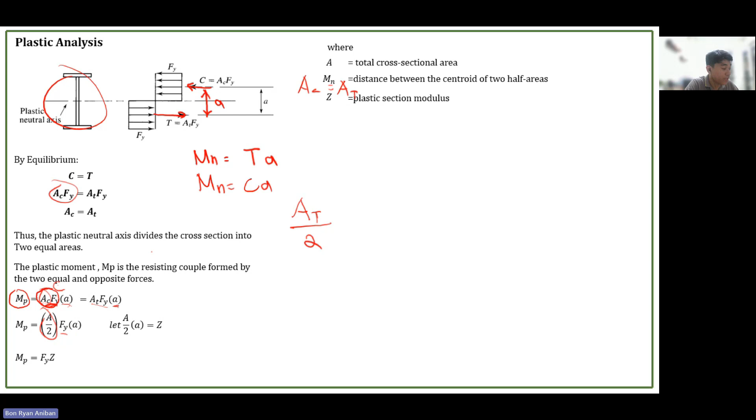Now let's say we call that A over 2 times A is equal to Z. So we name it Z. Now, that Z - therefore the value of the plastic moment is Fy times Z. So Z is the plastic section modulus, and Mn is the distance between the centroid of the two half areas - again, A over 2 times A is your Z.

So you get half of your area times A, or you can also do it this way: take the half, then you have the total area. So it means you need to get the area, then you need to identify the distance going to this axis - you divide it in half, and you have to identify this axis, and that is your Z.

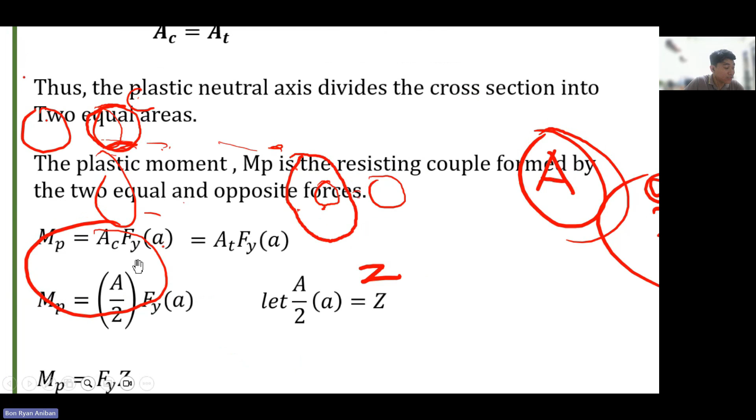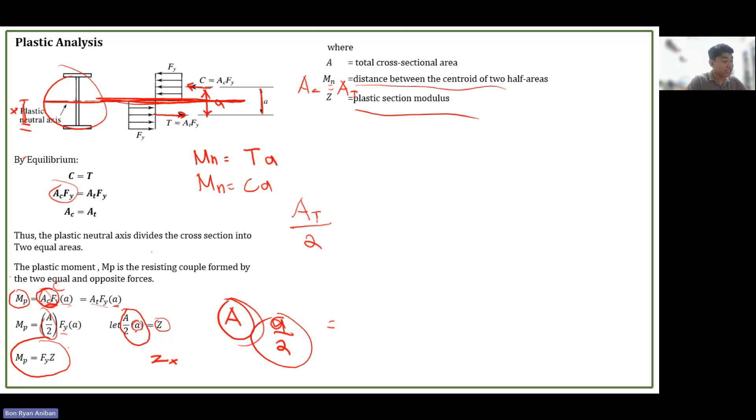Or on standard AISC standards, we call that ZX. So there's also ZY, but if we're referring to this axis, that is your ZX. Later on, we are going to try to solve some problems and locate that distance X, or the plastic neutral axis - so we're going to solve this plastic neutral axis.

Now let's try to solve this plastic moment and elastic moment. From the built-up section shown in the figure, bending is about the x-axis, and the steel is A572 grade 50, with Fu of 450 megapascal and Fy of 345 megapascal. The section properties are the base flange - this is a built-up section, meaning we don't have any data from the AISC database. You have the base flange, thickness of flange, effective depth, thickness of web, modulus of elasticity, and the Fy. So we are going to get the yielding moment, My, and then the plastic moment. So what is the difference between the yielding moment and the plastic moment?

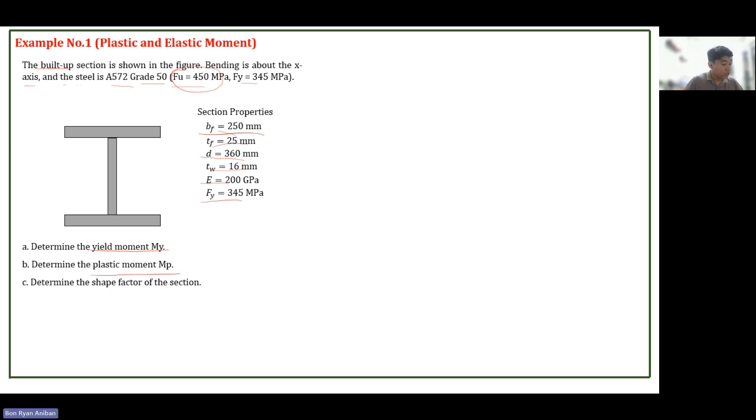This stress diagram was discussed in your mechanics of deformable bodies. To calculate the moment capacity of this section, this is the bending stress, MC over I. You may calculate the bending stress this way, as derived from mechanics of deformable bodies, so I won't repeat it here.

So this is MC over I, or I over C. When you divide it, I over C is called Sx. So therefore, for Fy, we can say that My over Sx equals Fy. And to calculate My, My is equal to Fy times Sx.

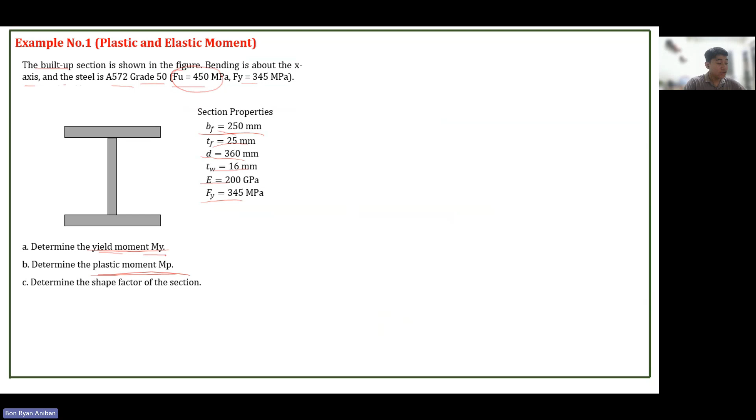So here, we are solving for the yielding moment, which comes from the stress diagram where only the extreme layers have yielded. When we say plastic moment, the entire cross-section has already yielded. So we also need the shape factor of the section.

These are the dimensions from the given problem. We just placed them in our figure.

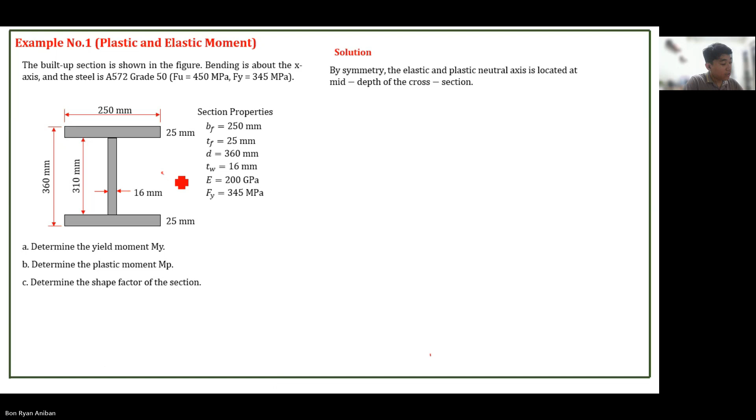By symmetry, the elastic and plastic neutral axis is located at the mid-depth of the cross-section. This is the beauty of a symmetrical section — when it's symmetrical about this axis, the neutral axis is right there, even the plastic neutral axis. But they can differ — we call this the elastic neutral axis.

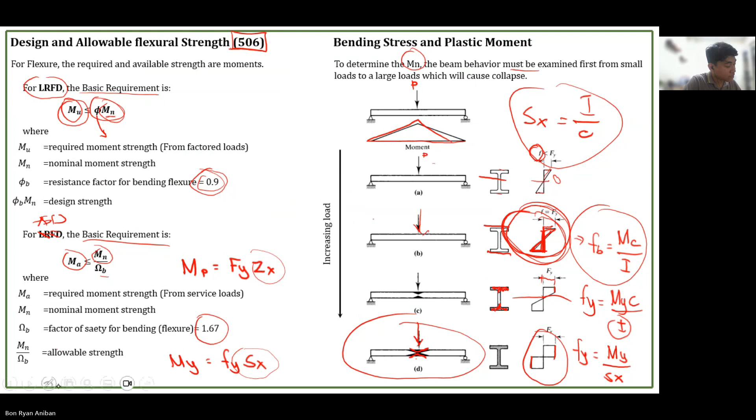When our stress diagram looks like this, the beam is still elastic, because only the extreme layer has yielded — the entire cross-section has not yet yielded. And when it hasn't yielded, the material is still elastic, meaning if you remove the load, it will just go back to its original shape.

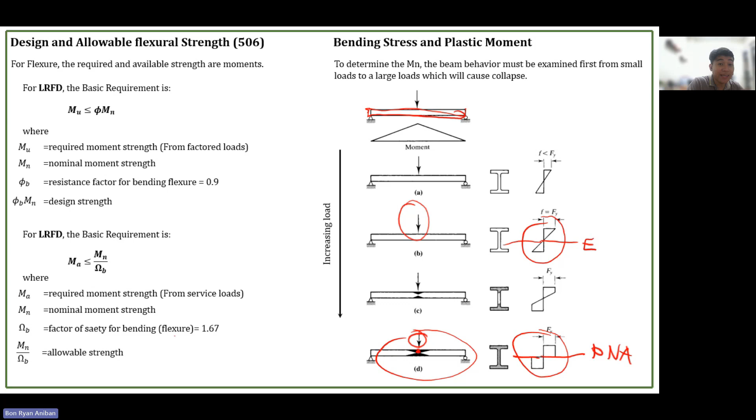For a symmetric section, the neutral axis and the plastic neutral axis are at the center, so you don't need to solve for that. Later, let's try to solve for the unsymmetric case. So for the elastic properties, we'll try to solve the elastic properties.

So we have the moment of inertia — actually, moment of inertia is an elastic property. To get the moment of inertia about the neutral axis, we actually have two solutions. One is the transfer formula.

This is our overall neutral axis. If you divide this into three sections or three areas, this area coincides with the neutral axis, so just get its moment of inertia, BH cubed over 12. But this area's own centroid does not coincide with the overall neutral axis, so there's a distance, and that's when you need to transfer it.

If you recall from statics, we have the transfer formula: Ix equals BH cubed over 12. The moment of inertia about the neutral axis equals the moment of inertia of its own section plus area times d squared — the distance from its own centroid to the neutral axis.

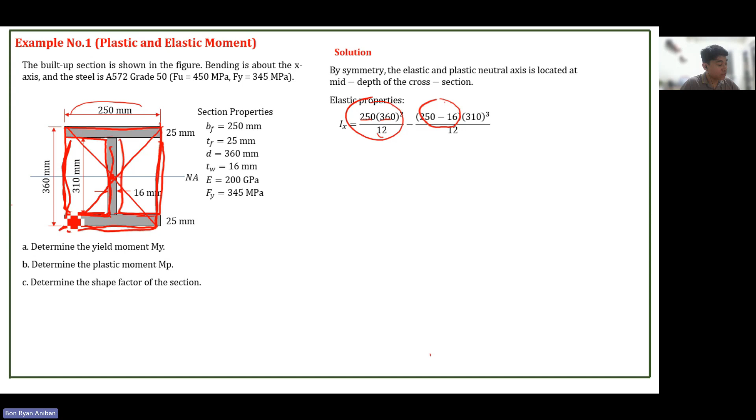Then, since there are actually holes here, we just subtract them — there are two holes, but I combined them. So our B here becomes 250 minus 16, the total dimension plus this one, 250 minus 16, times H, 310 cubed over 12. That will be the moment of inertia about the x-axis.

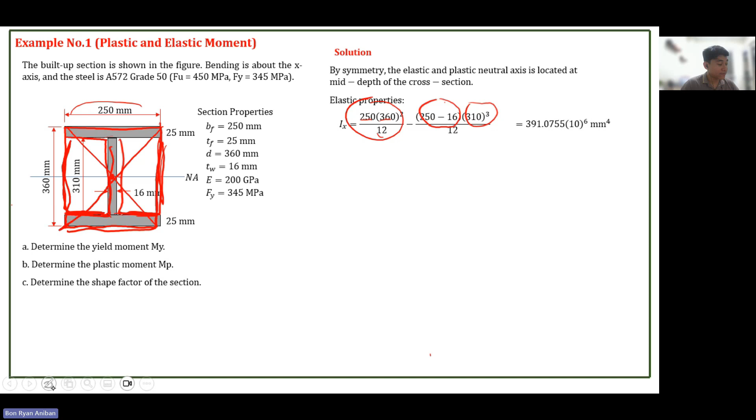About the y-axis and about the x-axis, let's discuss first the yielding moment and the plastic moment about the x-axis. Mainly, a beam should be placed such that it will bend about the major axis, the stronger axis.

We have the radius of gyration about x and y, and moment of inertia about x and y. You can justify how strong an axis is by just looking at the moment of inertia. From the standard sections, the y-axis is always weaker.

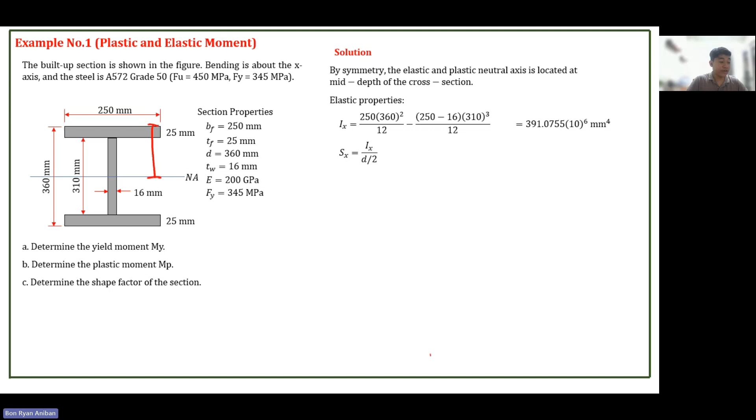Here in this problem, mostly the x-axis is what we analyze. Now, Sx is just Ix divided by the distance D over 2. That is our Sx.

So we divide 391.0755 by 360 over 2. This will be your Sx.

Now to calculate the yield moment or My, that is just Fy times Sx. We showed the formula earlier. Fy times Sx, substitute Fy as 345 megapascal, and then Sx. Take note class, Fy is in megapascal or Newton per square millimeter, and Sx is in millimeter cubed.

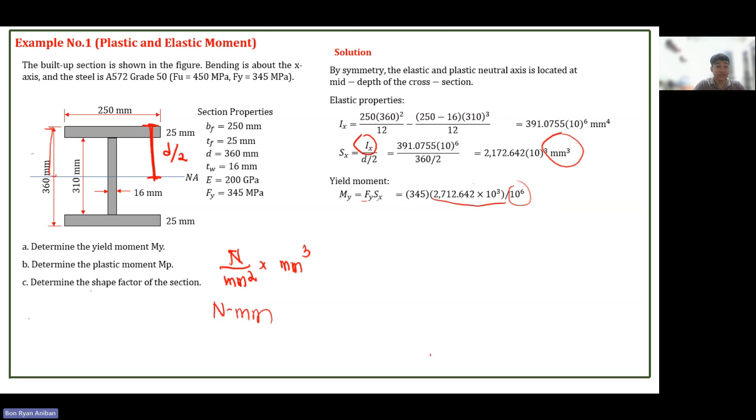So therefore, what will be your answer? Newton-mm. Mostly we express moment in terms of kilonewton meter, so we divide this by 10 raised to 6, or multiply by 10 raised to negative 6, so that our answer for moment becomes kilonewtons. So the yielding moment is 749.561 kilonewton meters.

We already have the answer here. Next is the plastic properties, let's proceed. One of the plastic properties is the plastic section modulus, or Zx.

Zx can be calculated by area times Y, as we showed earlier, but instead of total area, we use the summation of areas times its distance going to the plastic neutral axis. So summation of area times Y.

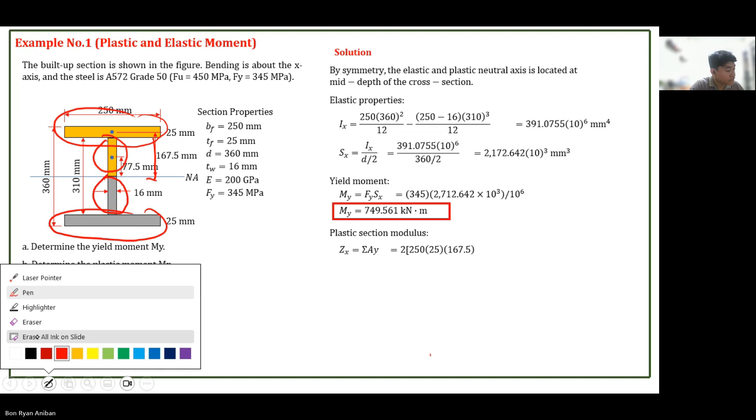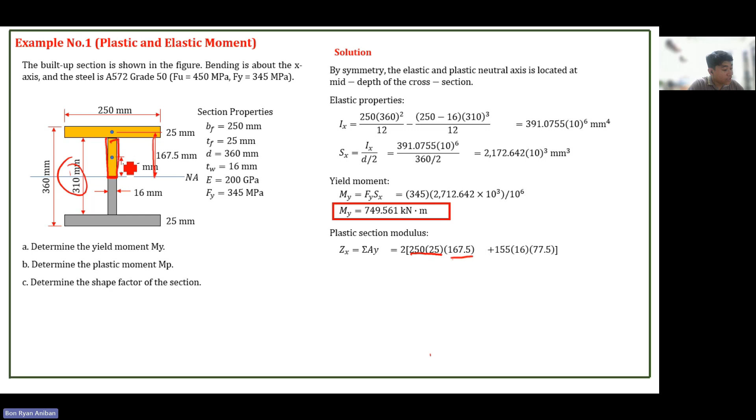So here it is: 250 times 25, that's the area, and its Y is 167.5, plus 310 over 2 is 155, times 16, times this distance of 77.5. Then we multiply by 2, class, because there's one at the top and one at the bottom.

Times 2, your Zx is 2478.15 times 10 raised to 3. So with Zx, we can now get the plastic moment. The plastic moment is Fy times Zx, where Fy is 345 megapascal.

And the Zx we got, times 10 raised to 3, is in millimeter cubed as well. Fy is in Newton per square millimeter, so therefore Newton-mm also results, times 10 raised to negative 6. So the plastic moment is 854.

Remember class, that the plastic moment is already larger than the yielding moment, so its capacity is higher, you get a higher value, because the entire cross-section already yields. Whereas for yield moment, only the extreme layer of our section yields, just the very edge. So, what is shape factor?

Shape factor is actually the ratio of the plastic moment to the yield moment. Or you can simply say Zx over Sx, because plastic moment is Fy times Zx, and you divide it by the yielding moment which is Fy times Sx. The Fy cancels out, so it's just Zx over Sx. That is the shape factor.

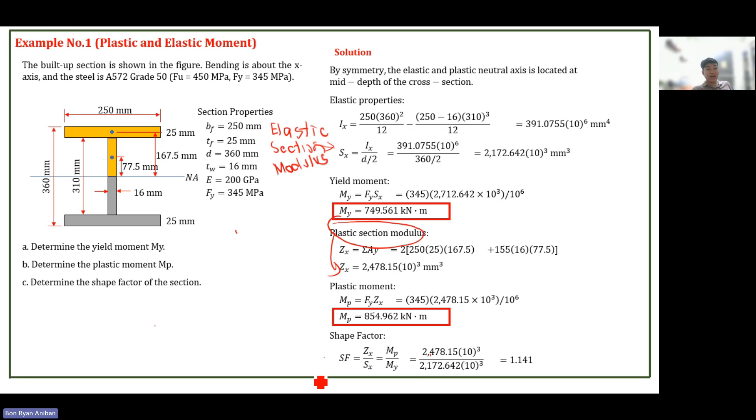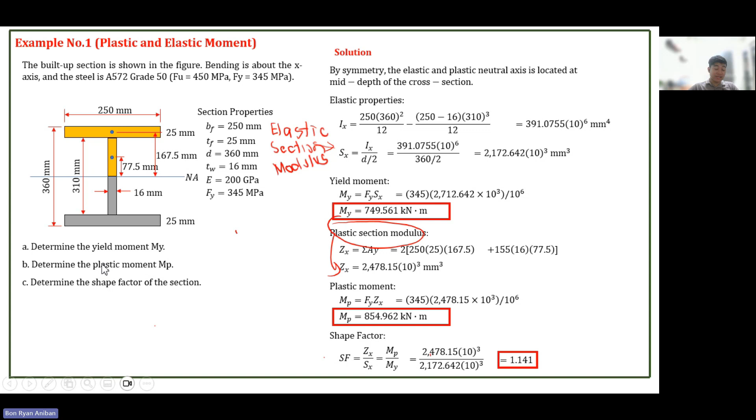Now let's try to solve unsymmetrical naman. We are going to solve the plastic and elastic moment. For this built-up T section shown, using Fy of 345 megapascal and Fu of 450, find the yielding moment, the plastic moment, and then the shape factor of the section.

Unfortunately, the elastic neutral axis does not coincide with the plastic neutral axis if it is unsymmetric about the x-axis. So we have to solve for both the plastic neutral axis and the elastic neutral axis.

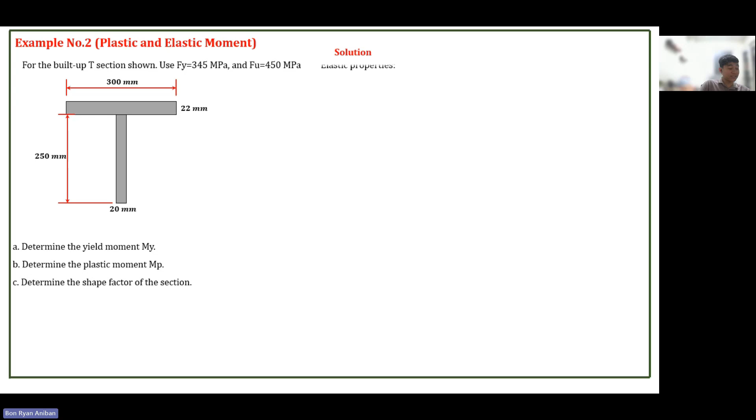This is to get the neutral axis. The neutral axis you studied in statics up to mechanics, that is actually elastic. So the assumption is just elastic.

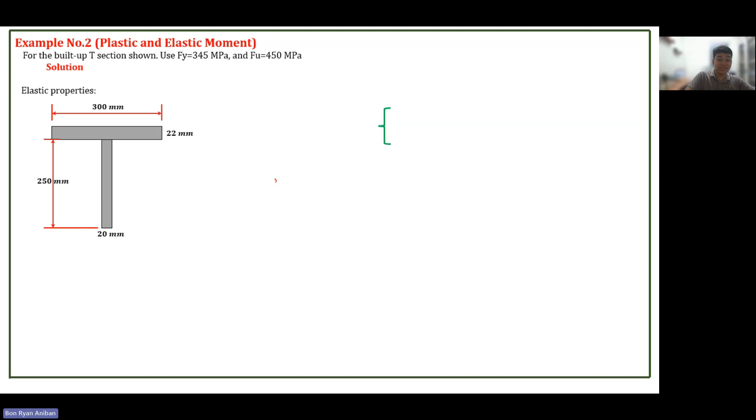So let's get the elastic neutral axis, measured from the top. You may also measure it from the bottom. We divide it into two cross-sectional areas: 300 by 22, and then 20 by 250.

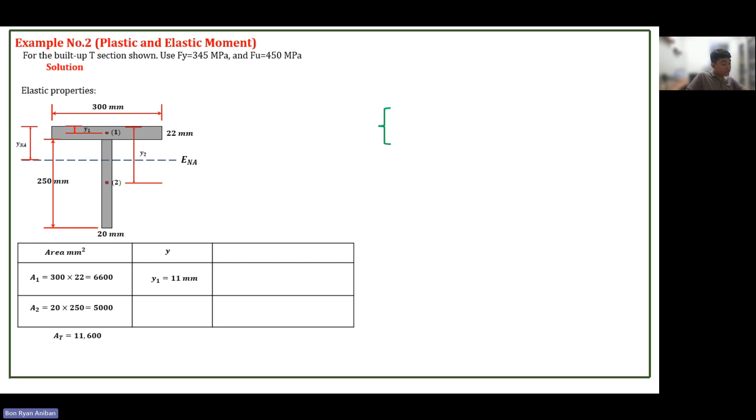Next, how do we get the distance for area 2, to the top which is our reference? So 250 over 2, plus 22. So 125 plus 22, that equals 147.

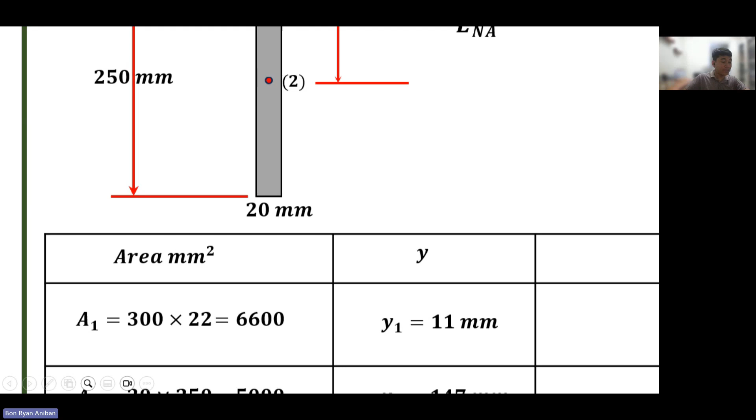Now this is the formula we use, going back to the style from last time. The area total times y bar equals area 1 times y1 plus area 2 times y2. Let's get y bar: area 1, y1, plus area 2, y2, over area total.

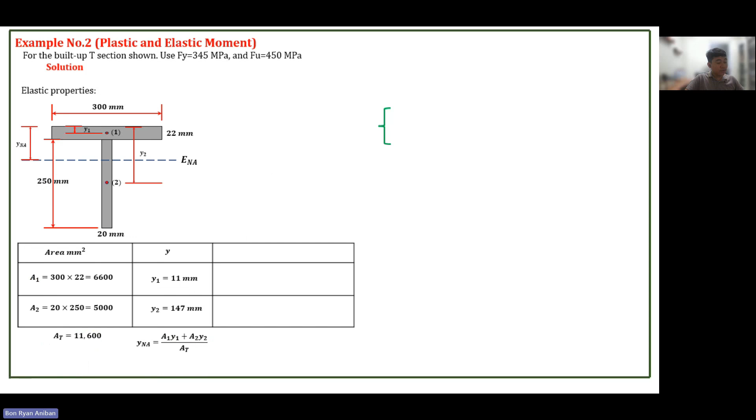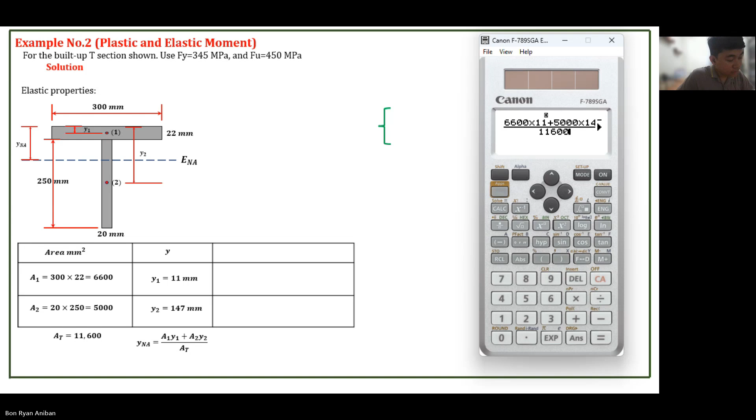That's why we got the total area. So let's substitute: area 1, 6,600 times 11, plus 5,000 times 147, over the total area. That equals, the neutral axis measured from top is equal to 69.62.

Aside from that, we also need to calculate and store this value in A. We also need to identify its moment of inertia about the neutral axis, Ix, which we need.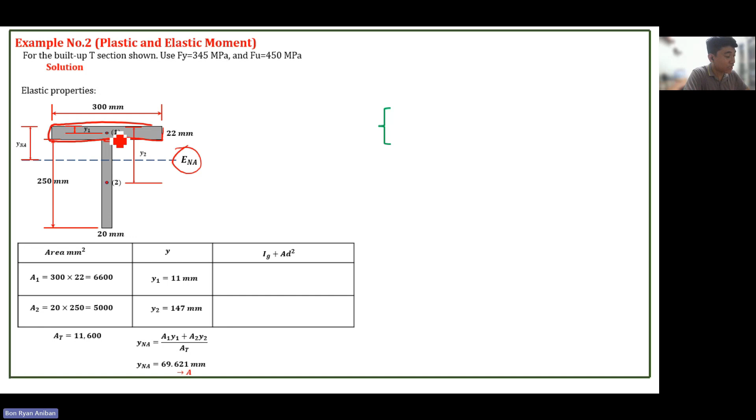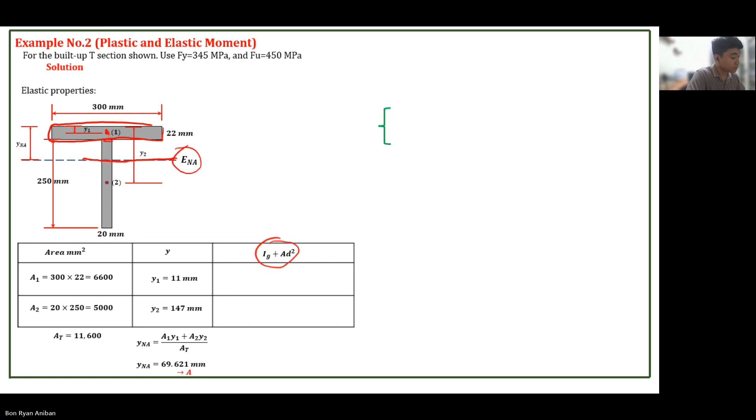Since each area does not coincide with the neutral axis, they're not aligned, so we have to transfer it. The formula for transfer moment of inertia is Ig plus Ad squared. Ig is the moment of inertia alone. Remember class, when doing moment of inertia, your B is always parallel to the axis, and H is perpendicular. So this is your B, this is your H, and you use BH cubed over 12.

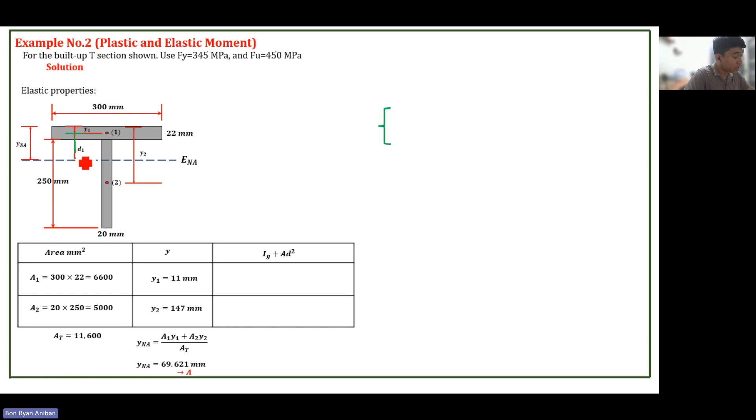You also need to get the distance of that point, of that area. Let's call this D1. So how do we calculate this D1?

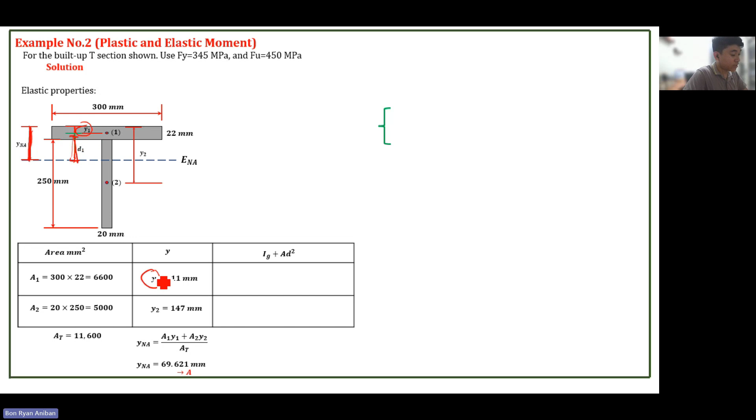So BH cubed over 12 plus area times D squared, using our A. Then get the values for this and this, add them up, and that gives you the summation of Ig plus Ad squared, which will be the moment of inertia about the x-axis.

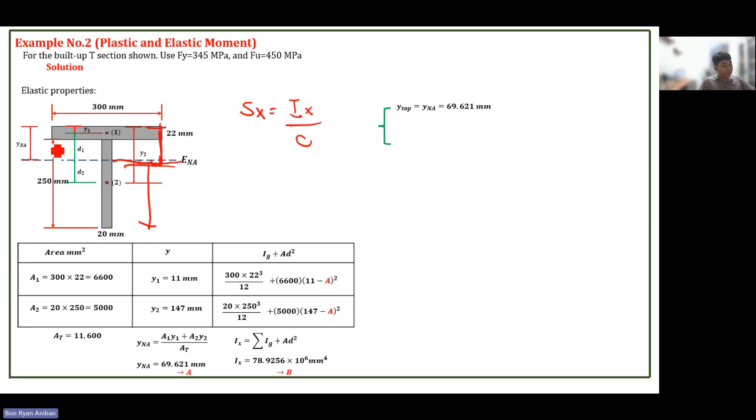So Sx is Ix over C, the distance from the neutral axis to the extreme fiber. Let's check which is longer: the neutral axis to the top, or the neutral axis to the bottom. If we solve for the neutral axis to the bottom: 250 plus 22 minus y top, so 250 plus 22 minus y top is 202. That's what we'll use as C for getting Sx, since this value is larger.

So the section modulus, Sx, is Ix over y, using both values. I stored this as C.

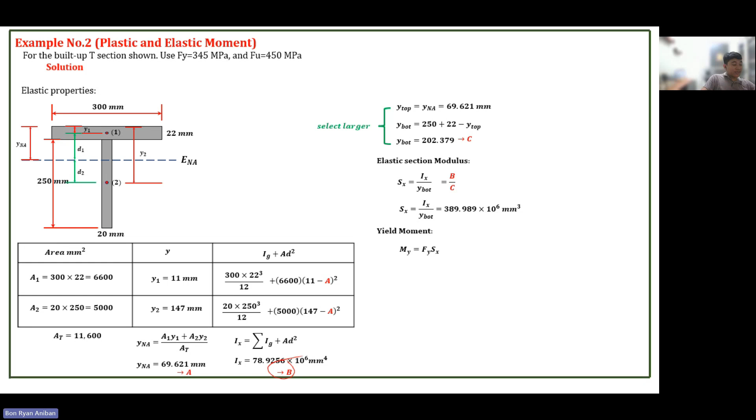So, B over C, that is your SX. Meron na tayo section modulus, SX. So, we can now solve the yielding moment. The yield moment is equal to FY times SX. FY natin is 345 megapascal. And then SX is stored, in-store ko pala ito sa B, guys. Stored at B. Times 10 raised to negative 6 na natin so that it will be in kilonewton meters.

Okay, next, ito yung answer natin, class. So, we're done with the elastic properties. Yung FY, SX, IX, elastic properties yun, class. Galing sa IX, yung neutral axis kasi, class.

Elastic neutral axis. Okay, so next is the plastic neutral axis. So, how do we get that?

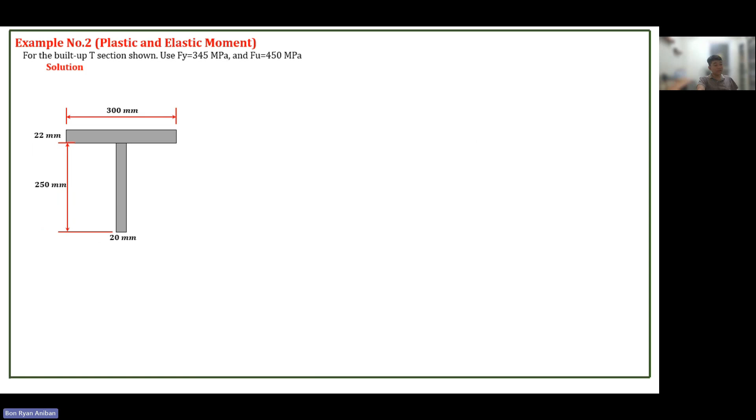Plastic neutral axis, so andito siya. Bakit ko nalaman na nandiyan siya? Tandaan nyo, class, yung total area, you need to divide it. Equal yung area ng compression, equal yung area ng tension. Assuming na nandito yung tension sa baba, sa taas naman yung compression.

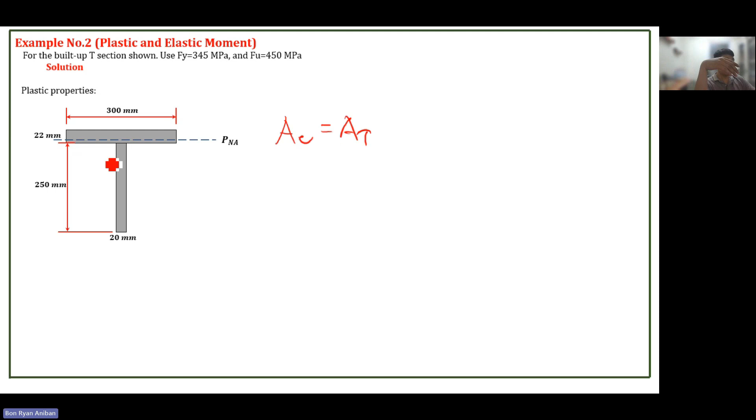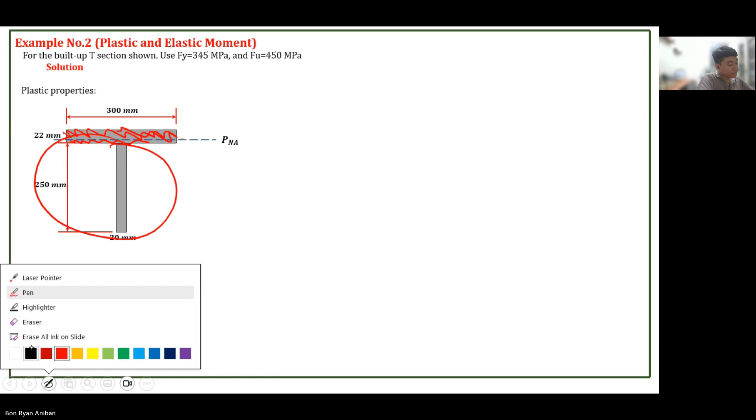So, paano natin nasabihin na dito maglalagay yung plastic neutral axis? Yun yung maghahati sa ating cross-sectional area into two equal parts, equal to dito, sa taas. Merong small portion dito na para nasa tension side. Huwag mo ilagay dito yung plastic neutral axis.

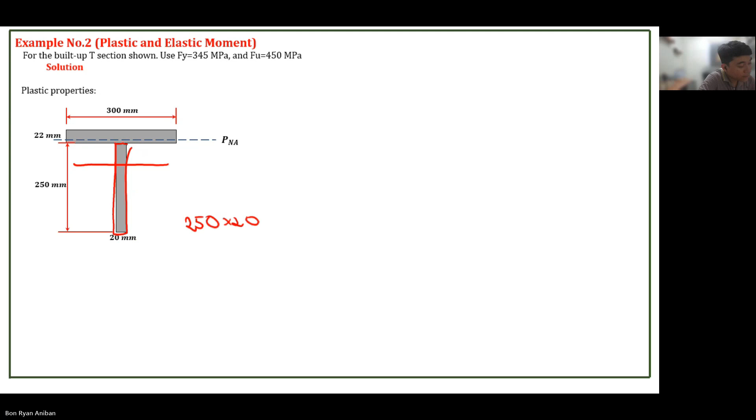Bakit? Kasi tingnan mo, class, ito, kung titignan naman tong section na to, 250 by 200, 250 by 20. Okay, 250 by 20, ilan yun? Yan, 250 by 20, 5,000. Dito na lang natin kasi dito yung value din, ano? 250 by 20, 5,000 yung area nito. Tapos ito nasa taas, 6,600. Ibig sabihin, yung nasa taas na area, sobra-sobra siya.

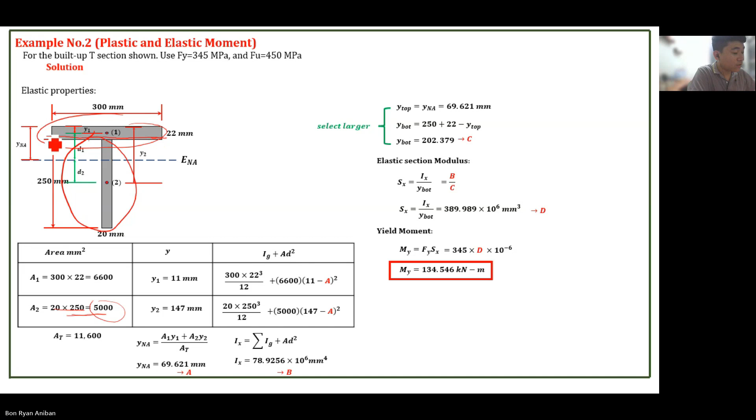Kailangan kasi equal yung area ng compression and equal yung area ng tension. So, bawasan mo tong flange na to. Okay, doon mo lalagay yung plastic neutral axis para equal yung area na above the plastic neutral axis and below the plastic neutral axis. Okay, kaya we can easily identify kung nasaan yung plastic neutral axis, saan siya banda mag-fall if you are going to use the areas of each

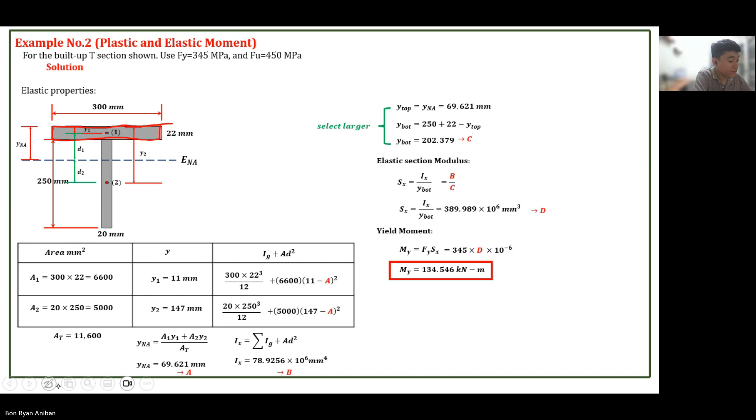elements, no? Flange and web. Going back, so, the assumption, of course, tama tong assumption na location na to, guys. Diyan yan yung plastic neutral axis. So, ito yung area na kukunin natin. Equal yan sa area sa baba. Pero hindi natin alam yung distance na to. Let's say this is x, measured from the top.

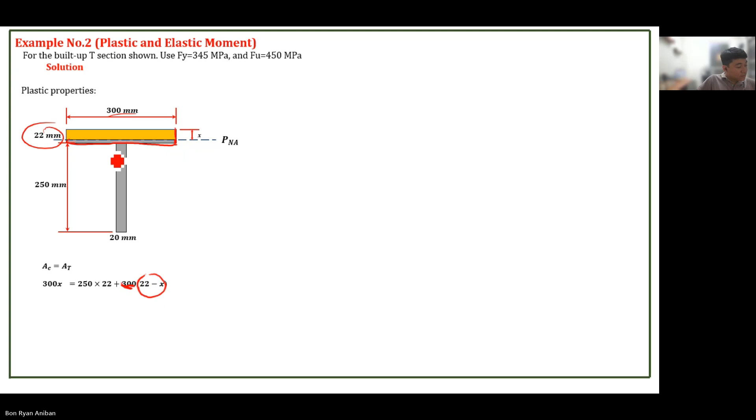Yung area ng yellow, equal yan sa area ng gray. Area ng compression is equal to area ng tension. Okay, so for the area of compression, so we have 300 times x. Area ng tension, sa baba naman. Ito class, ang height nito is 22 minus x. Tapos may width ka dito na 300. So add mo lang to, 250 times 20.

So with that, we can now solve the value of x. X is equal to 19.333. Store natin yung value sa A.

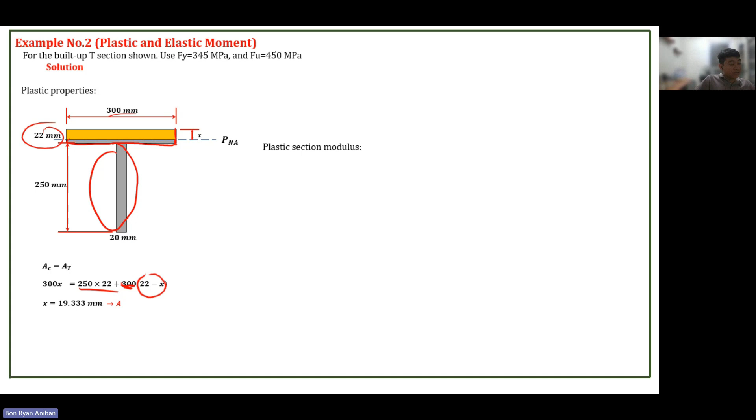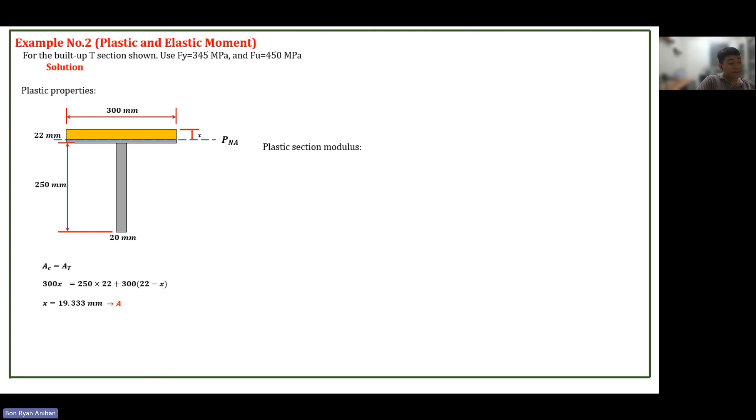Okay, then the plastic section modulus can now be solved. Kasi alam na natin yung location ng plastic neutral axis. Diyan natin i-momento yung kada area. Okay, so again, the plastic section modulus, Zx is equal to summation of the area times y. Y is the distance of the centroid of the individual area, okay, papunta doon sa plastic neutral axis.

So, isa natin, ito muna class, 300 times x. Okay, area niyan, tapos ano yung distance ng centroid niya papunta dito? E di kalahati ng x. Yan, yung x pala, in-store natin sa A. Okay, plus.

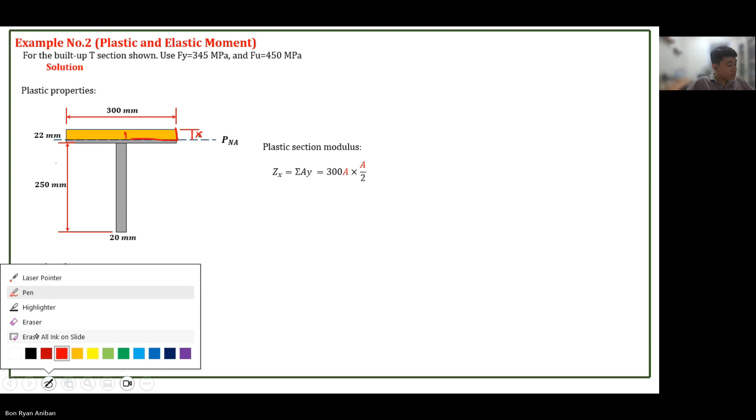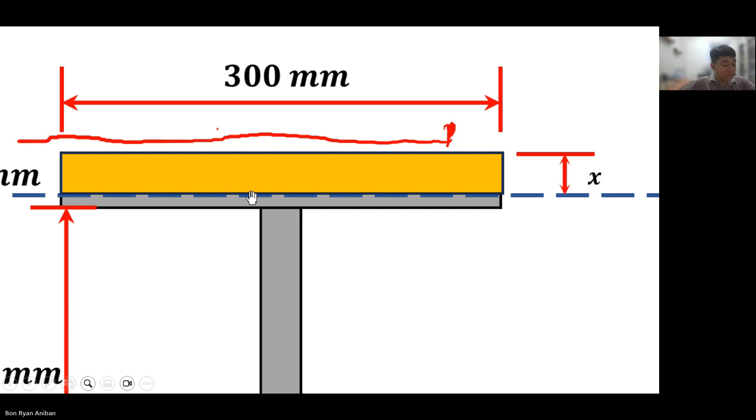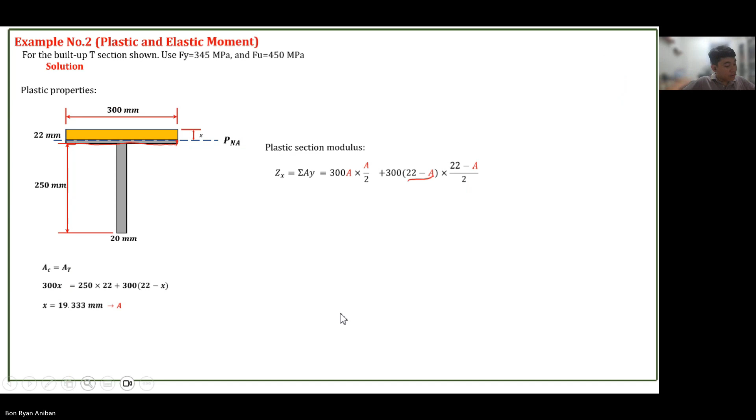Sunod natin class, itong maliit na portion na to. Yung base niya is 300. Yung height niya is 22 minus A. Tapos kunin mo yung centroid nun. Okay, kukunin mo yung centroid ng maliit na portion na to. Centroid niya, papunta doon. Yung centroid niya, papunta dito. Okay, and its area, so yun yung gagamitin natin class. Dito. Okay, sa own centroid papunta sa plastic neutral axis.

So, mukha tayo ng plastic section modulus ha. Then, finally, itong part na to. So, area niya, the formula A times Y. Area niya, and then, area 250 times, 20 times 250. And then, 250 over 2. Ang galing yan, centroid na ito, class, 250 over 2. Punta pa lang dyan, ha. Eh, papunta ka dito sa distance x, plastic neutral axis, rather. So, add mo pa, 250 over 2.

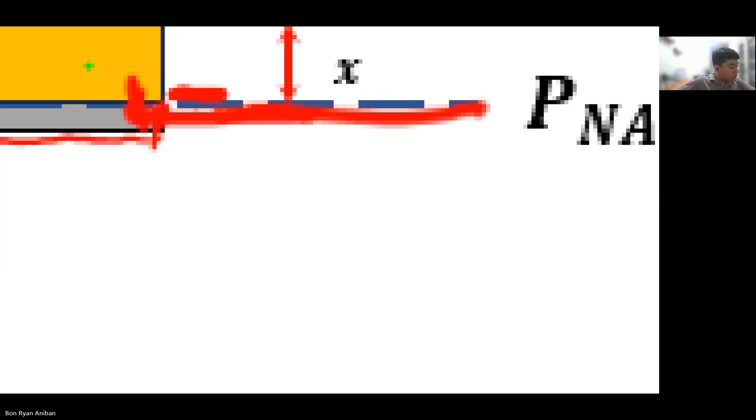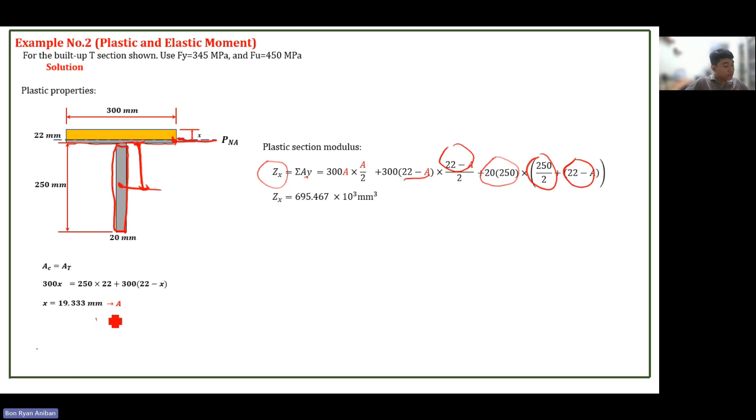Plus, yung maliit na portion na to, class. Okay. Yan, kunin lang natin, yung maliit na portion na yan, i-add mo yan doon sa 250 over 2. Okay, so, which is 22 minus A. So, with that, makukuha natin class yung Zx. Okay, Zx is 695.467 times 10 raised to 3 mm cubed.

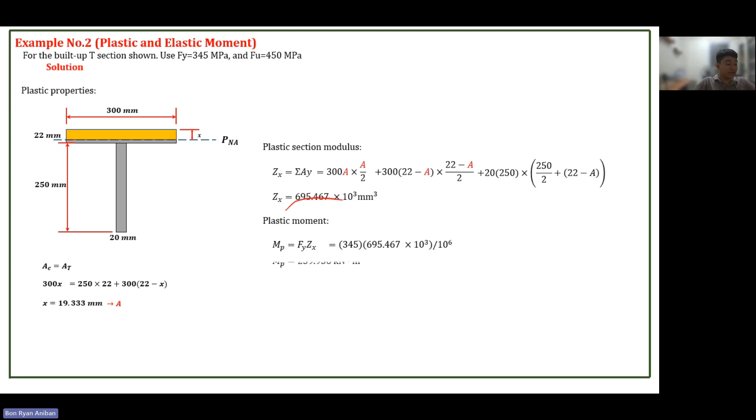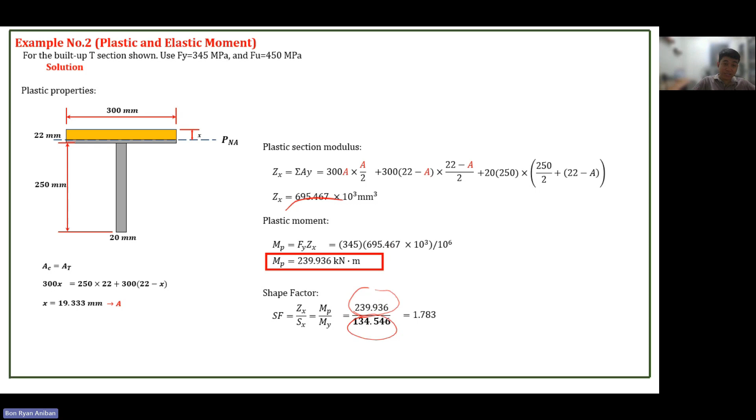So, therefore, the plastic moment is Fy times Zx. So, Fy is 345, Zx ito, times 10 raised to negative 6 ulit. MP is yun, this one. Pwede mo na kunin yung shape factor. Okay, plastic moment over the yielding moment. So, plastic moment natin, class, 239. And then the yielding moment is only 134. So, the shape factor is always greater than 1.0. That is 1.7.